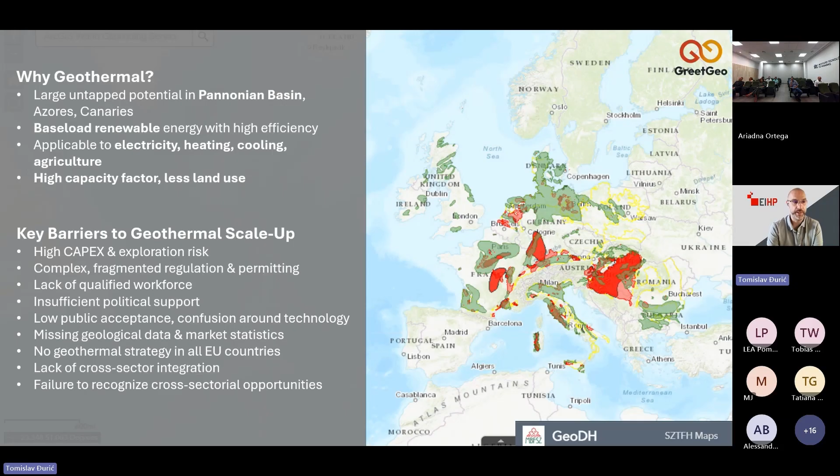So to conclude, there are many barriers, but the good thing is that we will try, through this project, to minimize those barriers.

So what are the objectives of the GreetGeo project? To encourage investment in geothermal energy, especially in less developed regions like the Pannonian Basin and other European areas like volcanic islands. We will develop innovation-based value chains for geothermal projects by connecting research, industry, and local communities, and support the development of regional S3 strategies.

We are going to prepare concrete projects for funding, develop business cases, and provide support for applications to European Union funds. We will also try to reduce investment risk through education and by exploring different financing models. So how are we going to achieve all those goals?

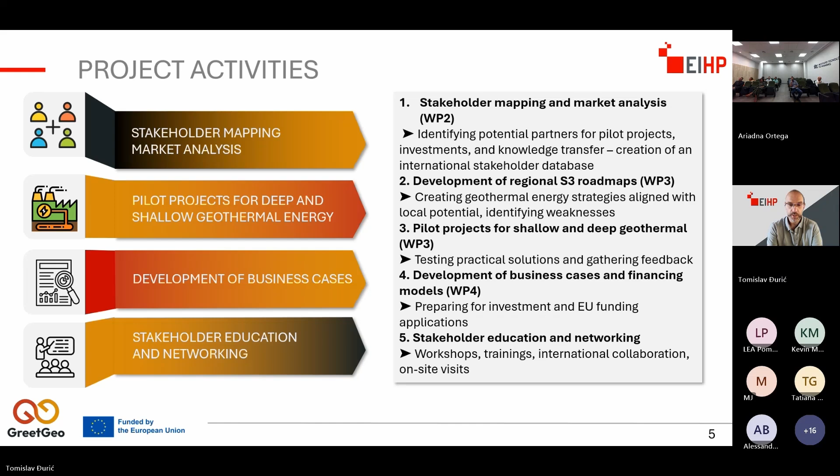There are many areas in the EU that have more developed projects and more developed stories and business cases regarding geothermal energy development, like Italy. But there are some less developed regions in Europe, like Croatia.

You see that we have only 13 exploitation fields, but we are heavily exploring new areas. We will utilize. The plan is to utilize geothermal energy for electricity production, for district heating.

We have by now one geothermal power plant. We have several agricultural utilization, tomato production from geothermal energy, a lot of balneology, spas, etc.

But we are, of course, always ready to receive new knowledge and to receive some new ideas and ways of some innovative geothermal energy utilization.

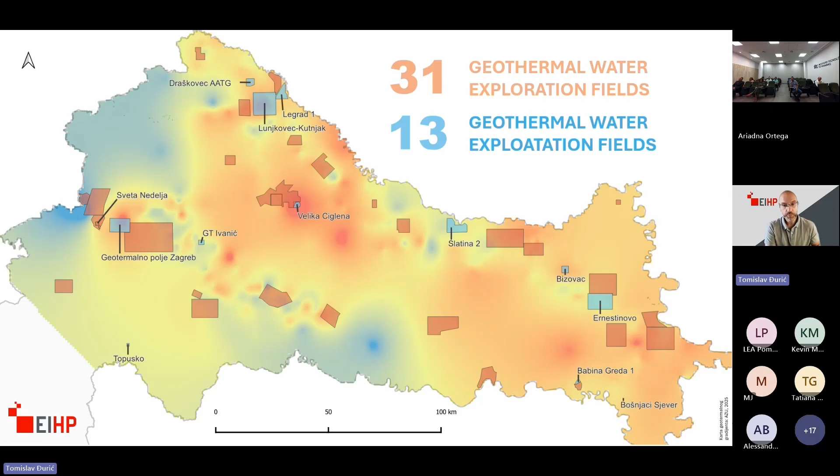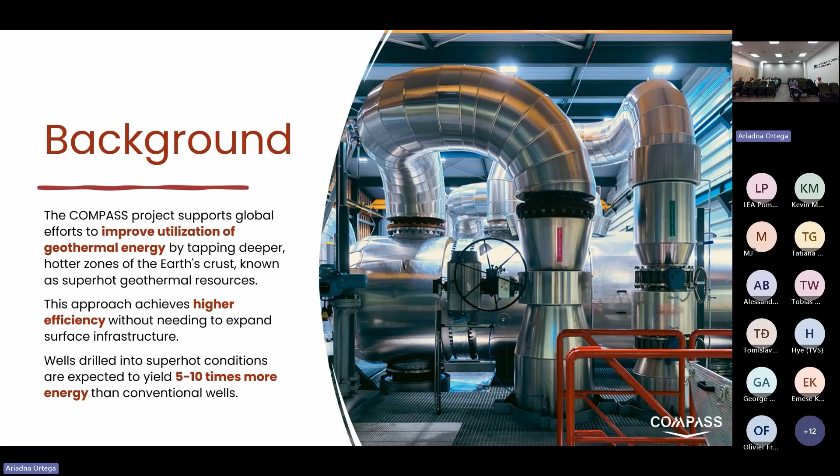So we're going into extreme conditions of geothermal energy. And another layer of that ambition is to improve the efficiency and also the footprint, so drilling less wells for more energy, and yes, wells that can yield 5 to 10 times more than conventional wells. Of course, there are challenges that we're trying to face, and this is why Compass exists.

Given the endeavors also worldwide to push forward such efforts, the major challenge is basically securing the wells, having wells that can withstand these conditions. So well integrity aspects are extremely important, and of course in a superhot geothermal context we have high temperatures and also temperature fluctuations, but also a chemistry that does not actually help with material resistance. So highly corrosive fluid chemistry is also one of the major challenges.

So in Iceland, there is the deep drilling project, the IDDP, which is a decades-long program that has been tackling that challenge of deeper, hotter geothermal drilling, and the experience with the previous 2 wells has given a lot of information. Of course, there were severe casing failures that informed basically the context regarding superhot geothermal and deep geothermal drilling. So Iceland is now preparing also for a 3rd drilling.

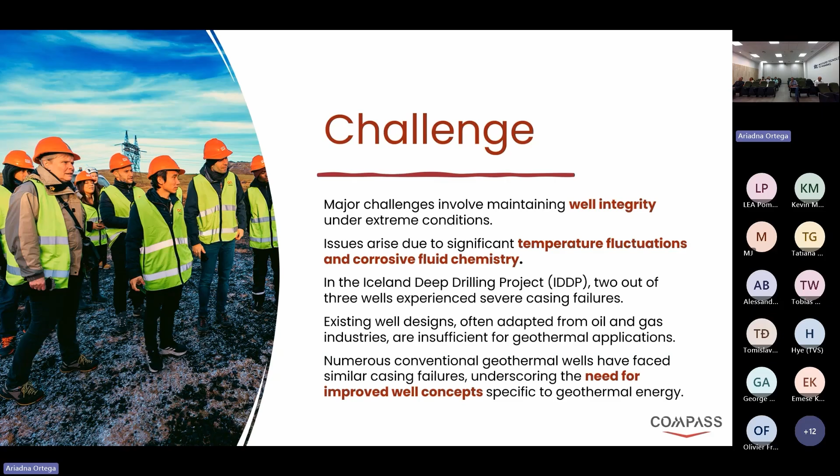So of course, we're working on well-casing technologies, foam cement solutions, laser cladding to tackle the corrosion challenge, and a whole comprehensive well design. Circular by design has been our flagship project as well, to also support the cost aspect. Drilling is costly, and engineering around geothermal is generally costly. So this is something we're trying to tackle, and we're trying to also expand the geothermal potential worldwide and have solutions that can be replicable in other places.

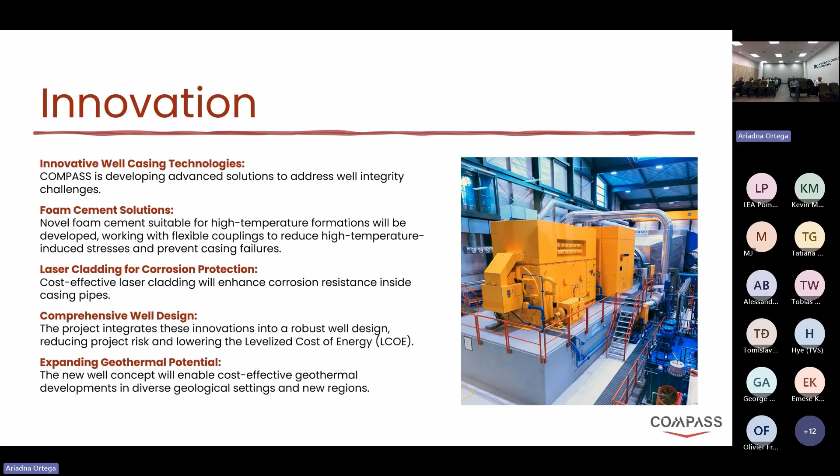So this is our consortium. We are a consortium of 10 partners from all around Europe, and we are supported as well by an external advisory board who has been actively involved with us over the lifetime of the project. Of course, we've been doing a lot of outreach. Part of Compass is also to support the social aspects regarding deep and superhot geothermal energy and high-enthalpy geothermal energy in general. We recently held Compass Iceland Week, where we had...

A large program, including a summer school, trying to train the next generation of experts in that field. We had a regional stakeholder workshop as well, same as what we're doing here, to initiate the dialogue within Iceland about the upcoming developments and what it means to move forward with drilling in these contexts.

And we've held workshops as well in Italy, where we have also our focus. So Compass focuses mainly on Iceland and Italy as case studies in a way. We also want to replicate towards island nations context and support awareness around the possibilities of these resources. So we're holding right now our workshop in the Canary Islands, planning another one for the Greek Islands, and had webinars, articles, presentations, and various events. We are looking forward to our final event in the European Geothermal Congress in October.

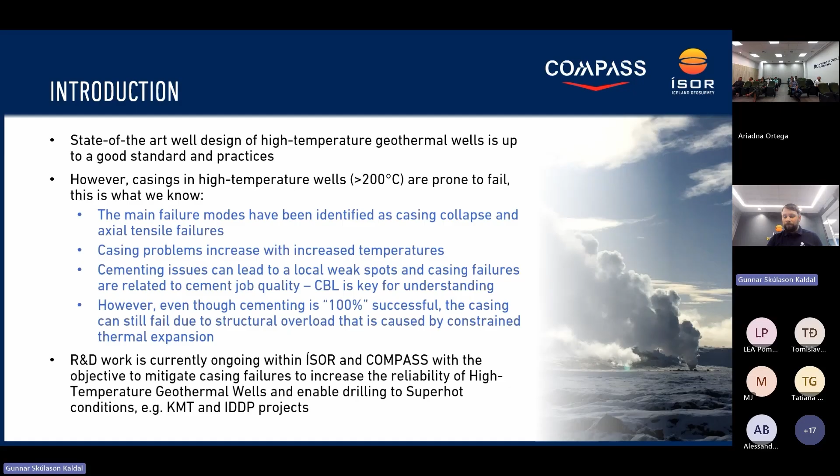So there is R&D work currently ongoing at ISOR and within Compass to mitigate these casing failures and increase the reliability of high temperature wells and enable drilling into superhot conditions. For example, the Krafla Magma Testbed project, drilling into magma, and the Iceland Deep Drilling Project. Now, high temperature geothermal wells have several stages, drilling stages, and casings are needed for each stage to be able to drill safely.

The casings are anchored with cement all the way to the surface. During drilling, there's circulation or injection of drilling fluids that keeps the well cool during the drilling project. When drilling has been completed and the well starts to heat up, the casings will thermally expand, and normally they develop stresses above the yield strength of the casing material, producing permanent deformations or plastic strains in the steel.

That calls for strain-based design in the code of practice, but in most structures around the world, they are designed to be elastic. So this is quite unusual to know that we have plasticity in the structure.

The typical temperatures we're dealing with in high temperature wells are about 200 to 300 degrees, all the way up to maybe 350 in some extreme cases. But in the super hot region, we are looking into 400 to 550 degrees even. We know that with the current structure as it is today, the most common casing materials will go past the yield strength at around 150 to 200 degrees for K55, and 210 to 240 degrees for L80, API L80 materials.

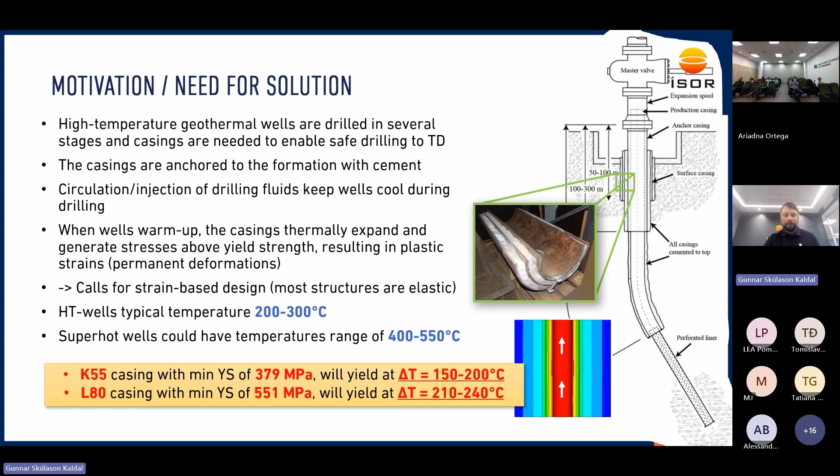We have done a survey of 136 Icelandic high temperature wells, where 75, or 55%, had some reported incidents. One quarter of those were confirmed casing failures.

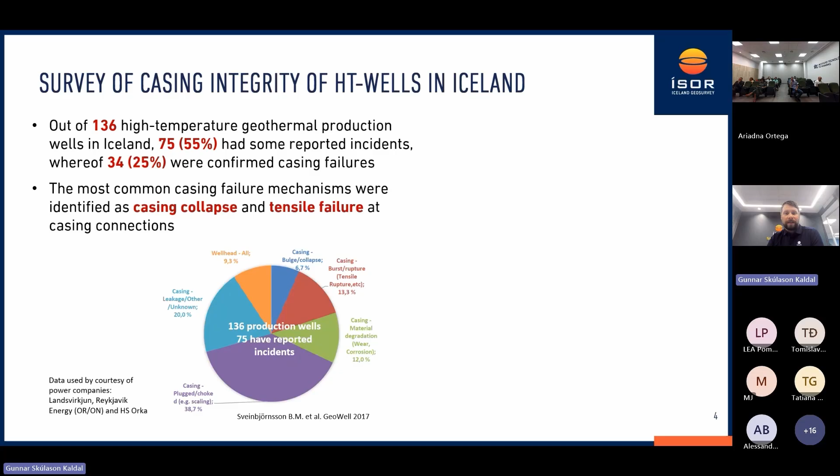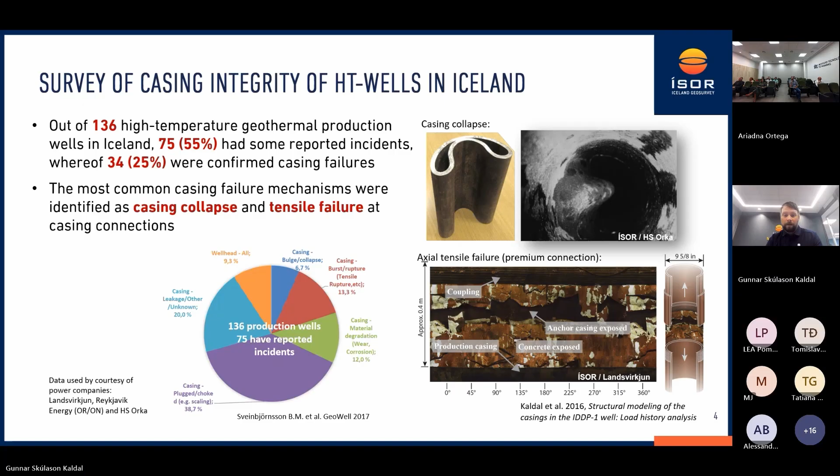We found that the most common failures are casing collapse, the one above, and tensile failure, where the casing tears apart if it cools down after being in hot conditions. We also see a high percentage of corrosion and wear problems, which Tommaso will talk about solutions for after me.

This is what we are doing in Compass in terms of increasing the integrity of the wells. We're looking into casing corrosion mitigation, cement solutions, thermal expansion mitigation, and casing collapse prevention.

I'm going to talk a little bit about these two, starting with the flexible coupling. The flexible coupling is a patented technology that has been in development at ÍSOR since 2015, based on the research we showed you before in Iceland and around the world.

These surveys let us know about the problems we need to solve. We have built prototypes and tested them at ambient to high temperature and pressure conditions, and a full casing string with these connections has been run in a well on ON Power's field in Nesjavellir. It was done this year.

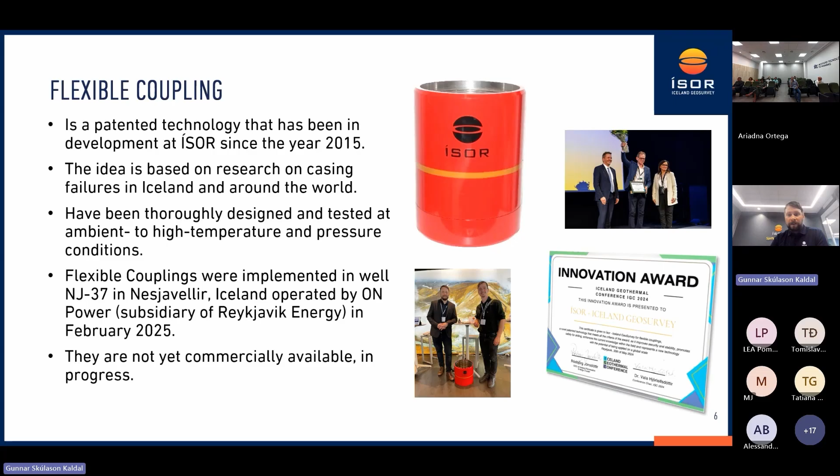The flexible coupling is not yet commercially available, but we are working on that. So how does it work?

So what we are doing with the flexible coupling is trying to work in the elastic range of the material, so we are not allowing the casing to get to these high stresses.

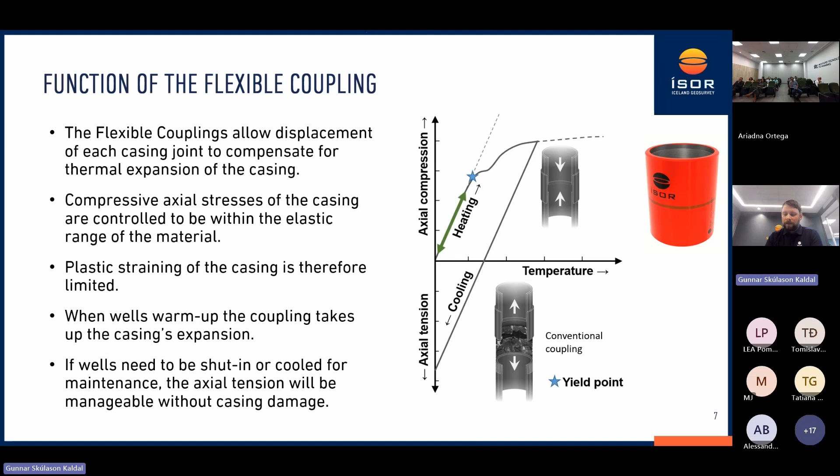How does it work? If we look into the coupling, we can see there is a thermal gap, and this thermal gap closes down when the casing expands. So instead of creating these high forces, it allows each casing joint, about 12 meters, to expand. And if the well needs to be worked on and cooled or injected with drilling fluids, it simply opens up again.

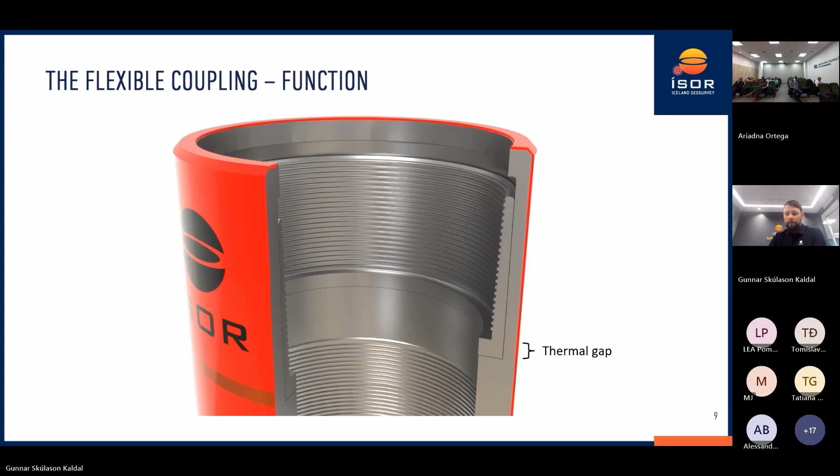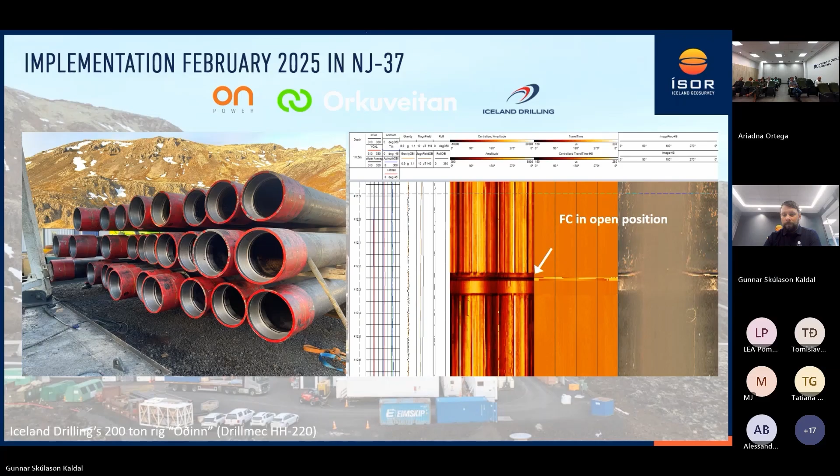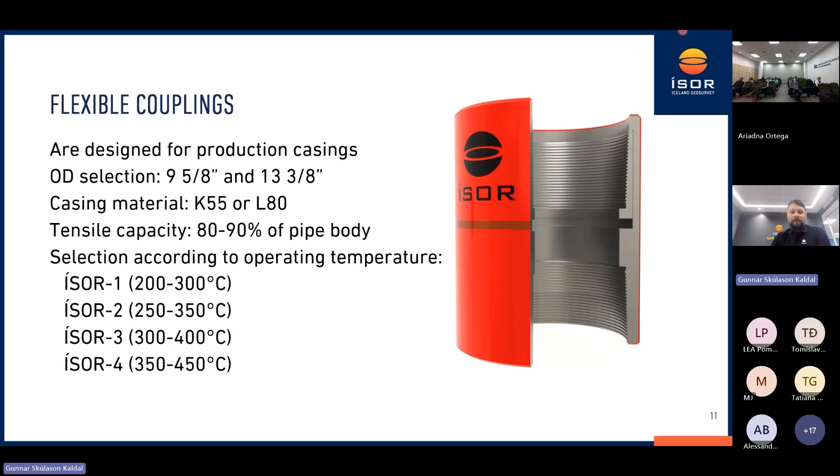So we have two sizes for this. These are the most common casing sizes for high temperature wells: 9 5/8 inch and 13 3/8 inch. We can choose what material it's made out of, and we can select the thermal gap according to the temperature that we need.

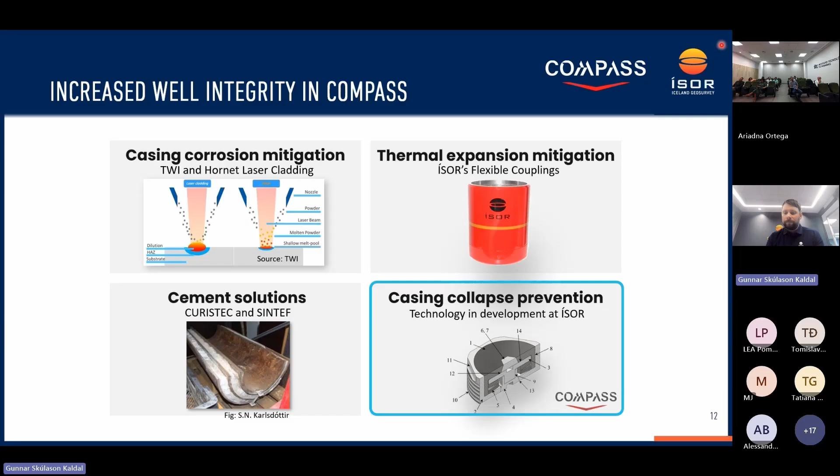Now for the other mitigation we are developing within Compass, this is casing collapse prevention. This is based on the fact that fluids can get trapped in the annulus between casings in the cement, and if the excess water in the cement is too high, it can develop pressures and collapse the casing. This can be identified in a CBL log, where we can see there's cement missing in a spot or section.

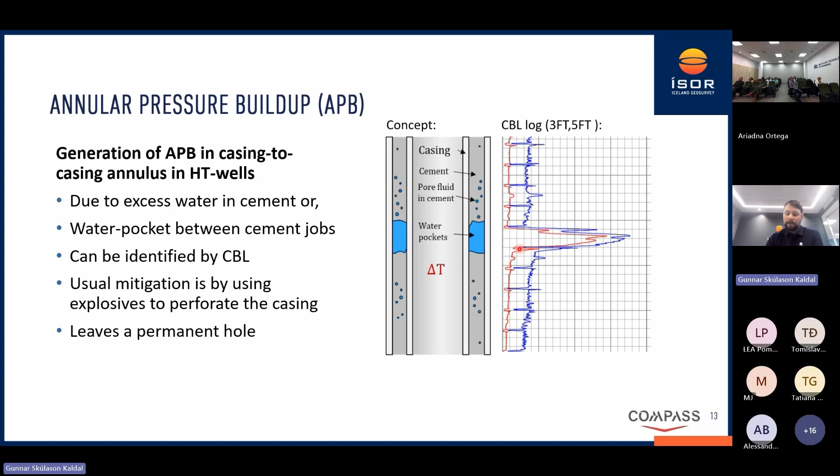The usual mitigation is to use explosives to perforate the casing at this depth. That leaves a permanent hole, as you can see here, but relieves the pressure out of the annulus. If the risk is left untreated, we will most likely get something like this, a collapse or bulge in the casing.

So how can we further control this? Obviously it's not the best option to have a hole in the casing, so we are trying to look into what we can do to reduce the risk. We have been looking into flexible cement solutions to allow some pressure to be relieved in the cement itself, using more flexible solutions such as foam cementing, which can be more flexible than conventional cements and provides pressure relief within collapsible bubbles in the cement.

This is being worked on by our partners in the Compass project. The other solution we're looking into is this casing collapse protector. The idea is simply to introduce an element into the casing wall where we allow the pressure in the annulus to escape into the well while the well is heating up.

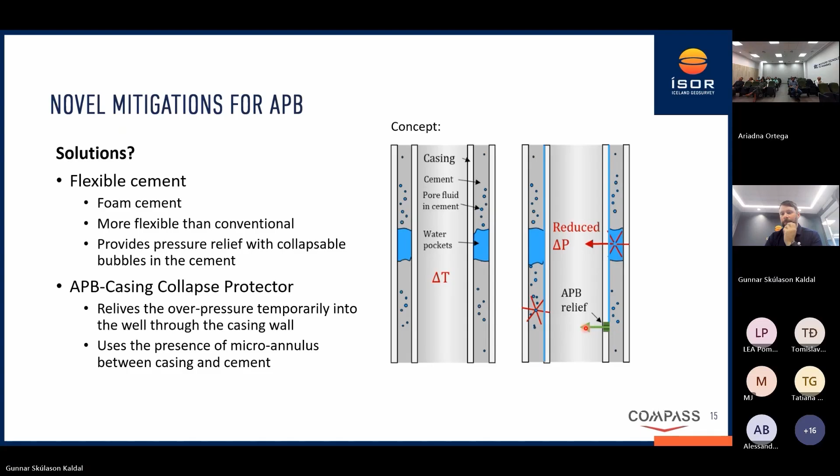We know that we have microannulus in the wells. We can see that from logging - with CBL loggings, after the well has heated up, we can normally see there is this microannulus. So we are using that to actually get a route for the pressure to escape into this valve. This is a relief valve that relieves this pressure without the casing collapsing.

And this is, as I said, in development in Compass. It is at a rather low technical readiness level at the moment, but we have already applied for a patent and built several prototypes that we are testing in the project.

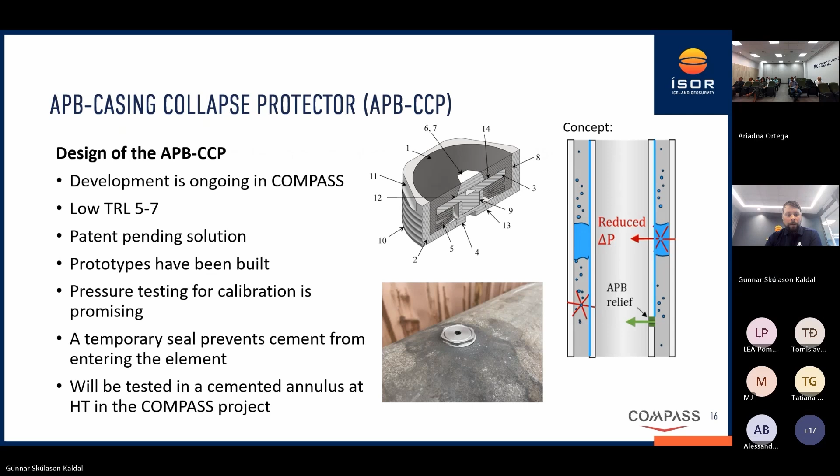We also looked into how to seal the element during cementing. We have a temporary seal that is not shown here, so when cementing is ongoing, the cement will not clog it or go into the element - it will only activate when the well heats up. We are testing this in testing equipment in the Compass project, along with the flexible coupling and the foam cementing we are looking into.

Thank you very much, Gunnar, for the introduction and background on some of the problems we're having in the wells. I think it's a really great solution you guys have applied throughout the project. I'll be talking more on corrosion and the issues corrosion can cause within geothermal wells, and how TWI has aided the process of reducing this issue.

Within the project, it was proposed to use corrosion resistant alloys, or CRAs, and coat the internal diameter of the pipes with more corrosion resistant materials - stainless steel and nickel alloys. A couple of materials were investigated throughout the project: stainless steel 316L, Inconel 625, and Hastelloy C276, to reduce the amount of corrosion.

Within the project, TWI also wanted to perform something more pioneering, outlined within the Compass project, using EHLA - extreme high-speed laser application - rather than direct energy deposition. This allows us to do something much faster and more efficient with thinner layers, so we can be more cost-effective.

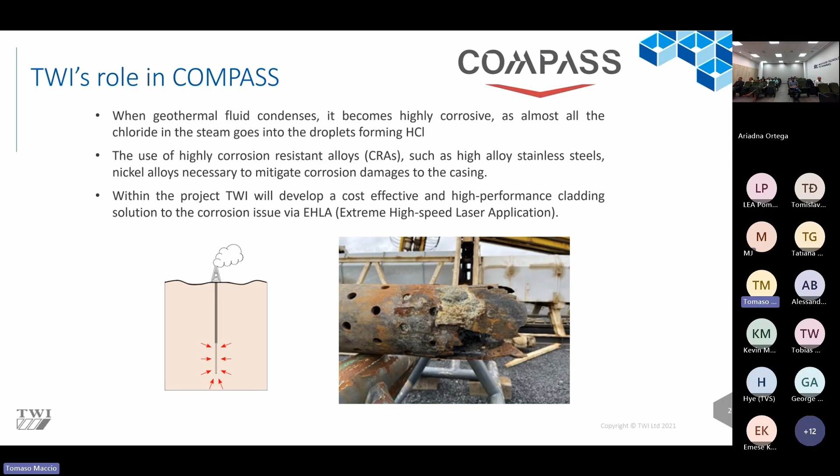Next, we want to understand EHLA. So what is EHLA, or extreme high-speed laser application? We're able to put down thin, accurate layers with low dilution at very high speeds - anything from 25 to 500 meters per minute.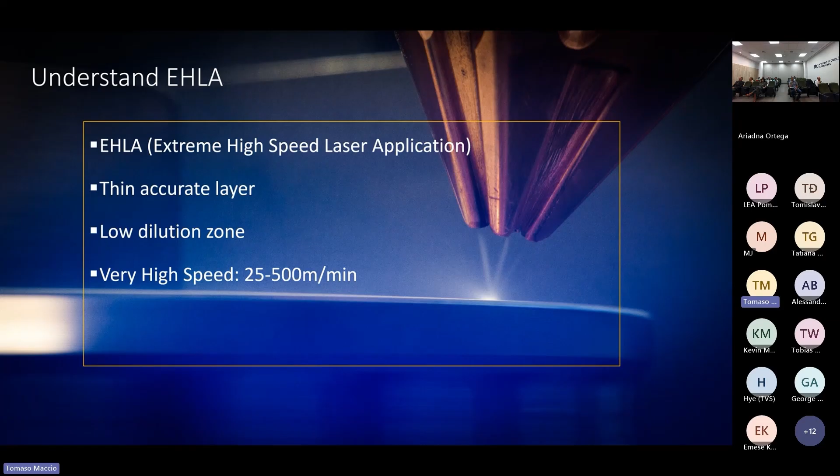So you're getting a lot of mixing, and this happens because the focus of the laser beam is melting on the substrate with the powder, whereas in EHLA, the melting happens around 1 to 2 millimeters above the substrate. So what happens in this process, the melting of the powder happens above the substrate and is sprayed on while it's still molten, sticks to the substrate, and creates a metallurgical bond.

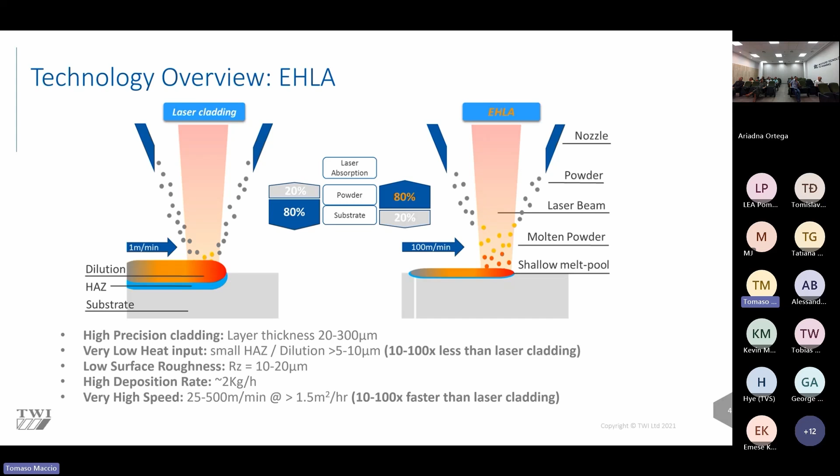So we can do high precision layers, anything from 20 to 300 micron layer thicknesses with very low heat input, anything from 5 to 10 micron heat affected zone, with very nice surface roughness as well, and high deposition rates. We're able to go at high speeds too, so 25 to 500 meters per minute. This is EHLA in process.

So just to give you an idea of the speeds that we can process at, here's another little video, and it gives you an idea of the schematic as well. So the nozzle is the triangular piece, that's where powder's blowing through. You can see the powder here in this area, and the laser beam is focused through the cone in the center and deposits onto the substrate.

So you're able to do high speed processing. You can see that wasn't sped up, that was in real time as well, just to give you an idea of the speed of the process.

So what other applications can EHLA be used for? EHLA is used for chrome plating replacement, as a thermal spray alternative, weld overlay replacement, and application for corrosion and wear like we're using within this project. And then we're looking more into a crossover with green technologies, like we are currently.

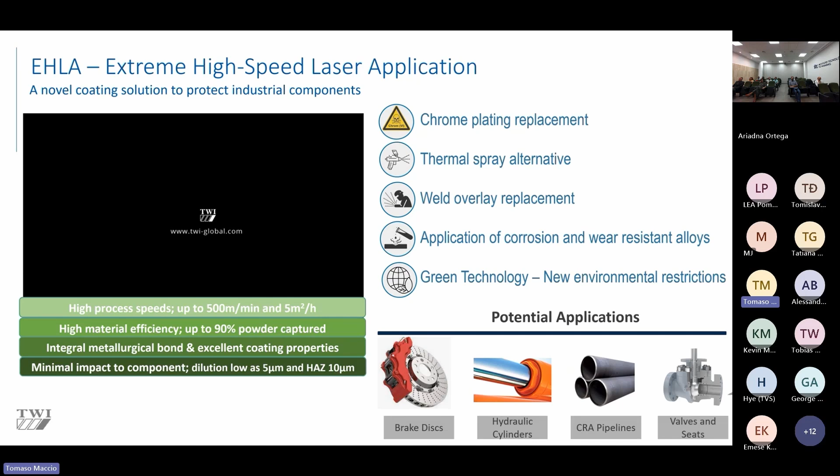There's also the use of brake discs we could use it for, and hydraulic cylinders, and corrosion resistant alloy in pipelines and valve seats.

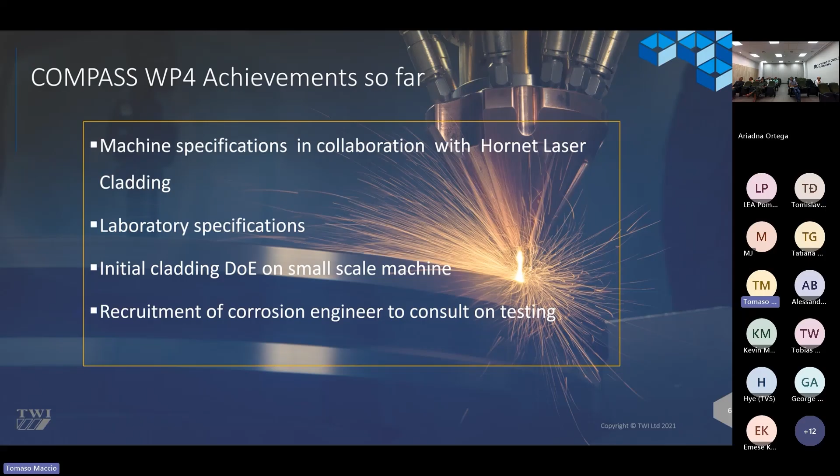So Compass, and what Compass has done so far. Machine specification in collaboration with Hornet Laser Cladding, laboratory build, recruitment of engineers, and then installation, initial design of experiments, and then the final design of experiments and some results following that.

So the Compass machine was installed in September 2024. It's been installed with a 12 kilowatt laser, so a high powered laser, and a 6-axis robot that's allowed us to program in several different areas of the bed and to create the samples and geometries for the testing that we've been doing within the project.

We've also installed a fully interpolated turntable that's been very useful for doing samples and geometries, and we've got a load capacity of 1,000 kg. This is useful for the pipelines that we can add in.

So this is just a feasibility study at the moment, it's not the full length of the machine. We're not able yet to clad the full 12 meters on this machine, we could clad 4 meters externally, and 4 to 5 meters if we rotate the component around. So it's just for the initial feasibility study of doing the cladding within this work package.

So I'll go into a little bit of the results so far and characterization that we completed on selected parameters. Not everything, these are the selected ones that were most desirable, really, the best results that we got. It's important when doing laser cladding, and especially extreme high-speed laser application, to balance the parameters right.

So if you're getting too hot, something that we noticed when samples were too hot, we got hot cracking, which is solidification cracking. When the deposited material is cooling down, we got cracking. We don't want cracking when we're trying to reduce corrosion and apply a coating on components, so that's something to consider.

Then also when using higher power, sometimes you might get gas pores. The lower melting point alloys within the alloy can boil off and vaporize, so that can be an issue as well.

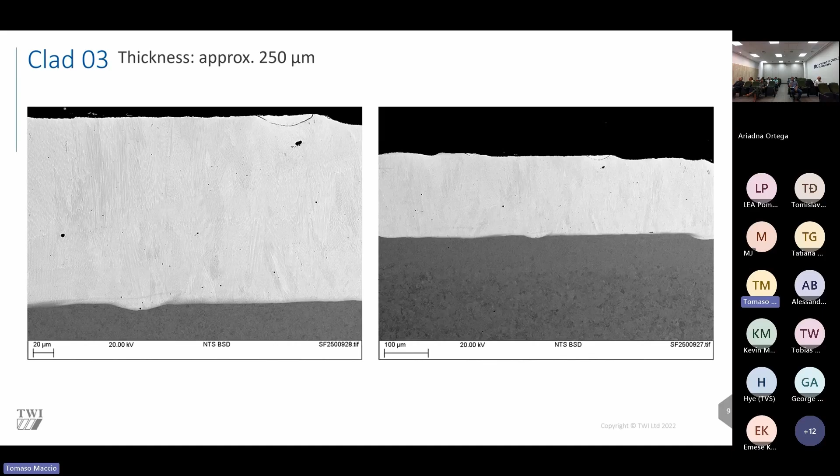But this sample here is most desirable, so very minimal defects. You can see there's some small defects over here, but judging by the scale bar, they're not over 5 microns in width, and then there's some tiny pores here. You can also see that the grain structure is very columnar, which is desirable for the coating compared to the substrate. The next few slides will demonstrate nicely the heat affected zone and the low dilution as well.

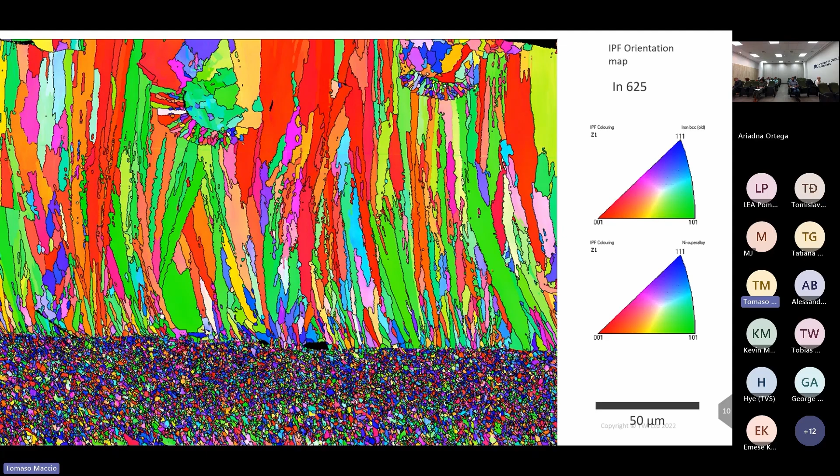So this is some EBSD completed within the component. You can see the nice difference in substrate to deposit in the grain structure. We're getting nice long columnar grains, which is desirable and expected from laser cladding as well as EHLA. This is what we were looking for, and we can also see that there's not much mixing of the material. The heat affected zone shown here, with traditional laser cladding, you'd be getting a large amount of dilution and lots of mixing, lots of iron, and the substrate would be more penetrable. This is something really nice to display the heat affected zone and the lack of mixing that's going on, which is again desirable for us.

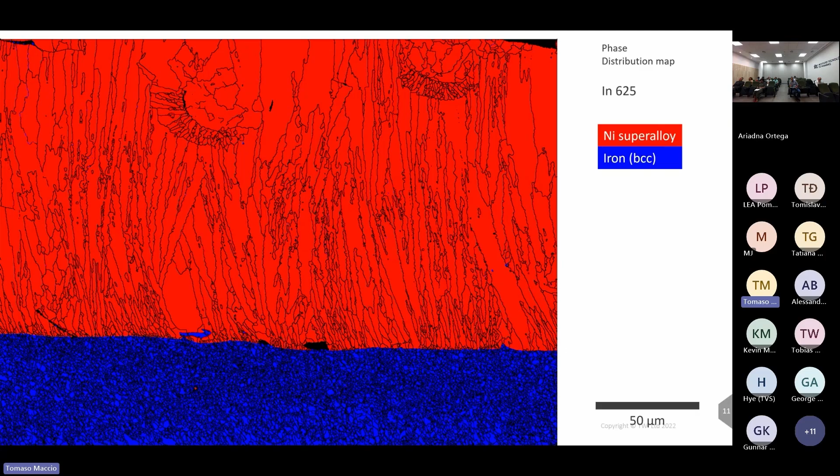So we've got nickel superalloy. This is a phase distribution map, with nickel superalloy displayed in red, and iron displayed in blue on the substrate. It's really doing as we expected, with a minimal amount of mixing, which is what we want, so less susceptible to the HCl that would be present in some of the material.

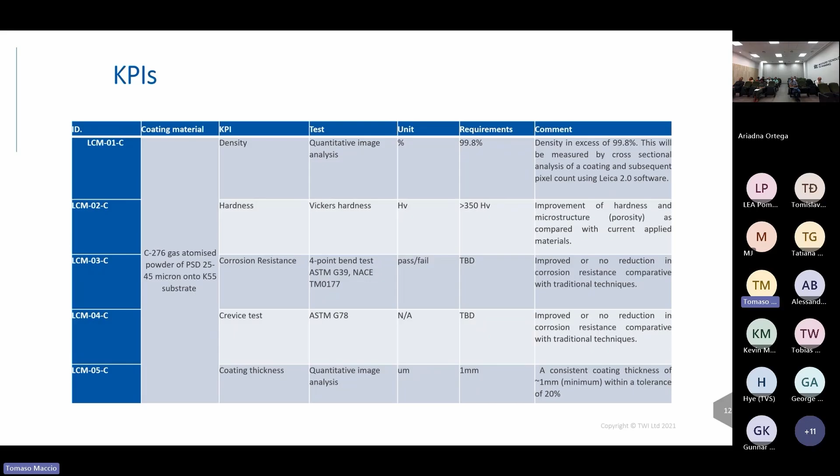After the analysis, we completed the analysis and we're happy. We've produced a large array of test samples to look at the KPIs, so density, as we described, with a high amount of density and hardness, and then we'll go on to do the corrosion resistance and coating thickness analysis.

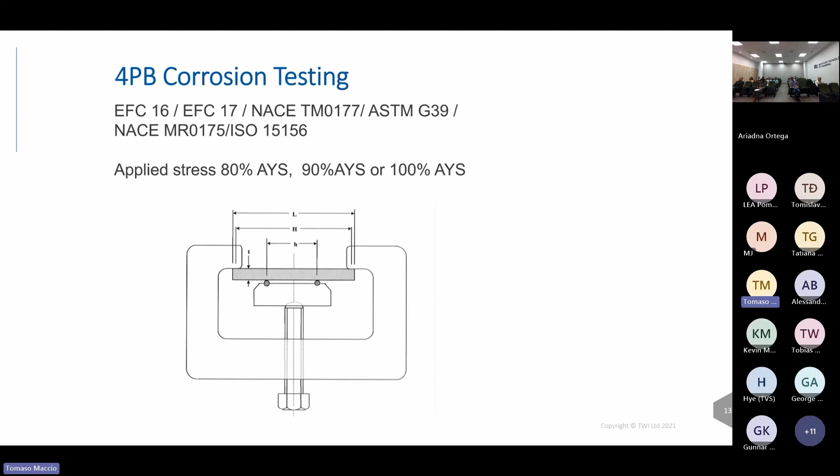Coming up in the next 2 months, there's some 4-point bend test corrosion testing to take place with different stresses applied, completed in our laboratories in Cambridge and also with ISOR, our colleagues in Iceland. Then there'll be autoclave testing, in a brine solution similar to the geothermal environment, testing samples coated and uncoated, and measuring the weights afterwards to see the losses caused by the corrosive solution.

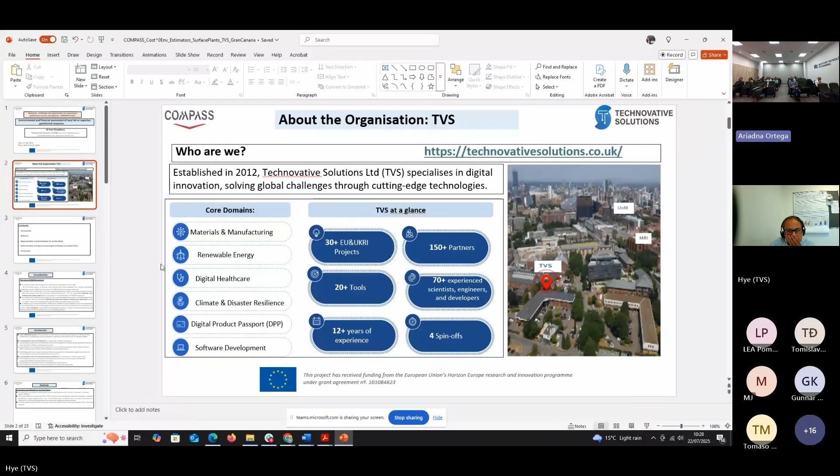Okay, just one. Para tener acceso. Screen one. Can you see my screen right now? Yes, now it's correct. So if I move the slide, can you see the changes? Now it's changing.

Okay, so these are the contents of the talk today. So first I would like to talk about what are the roles in Compass projects.

So what we are doing in the Compass projects, we are developing two estimators: one we call the cost estimator, and another we call the environmental impact estimator based on the LCA model for environmental estimation, and also a parametric cost model.

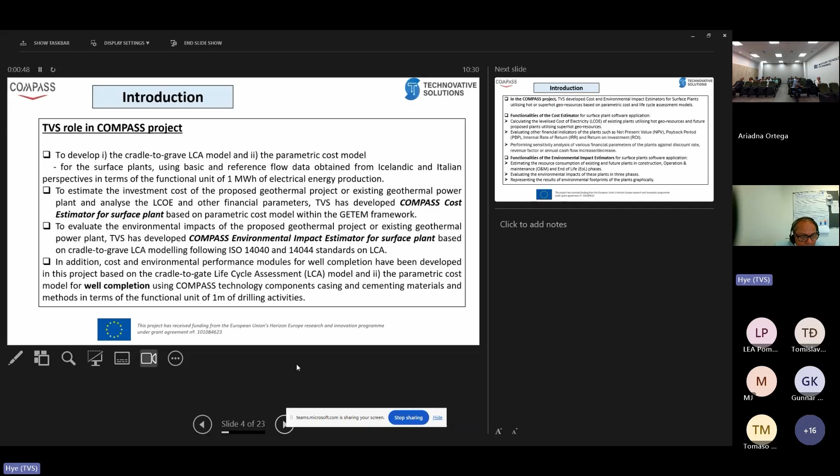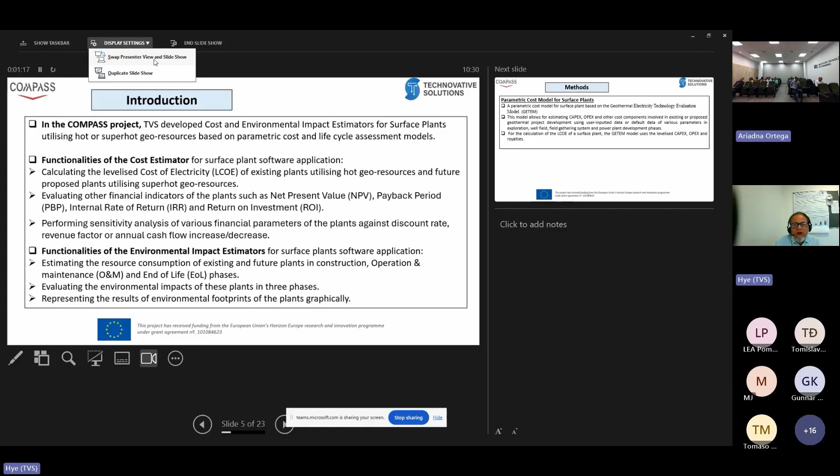Could you put it in presentation mode? You can see my presentation mode right now. Can you see the screen changes? We're seeing it in presenter's mode, so if you have two screens, you need to pass it to the other screen. Go to display settings at the top of the screen, click on the display setting and swap presenter view with slideshow. The first one, swap. Now you can see my introduction.

That works, thank you. It's working properly now. Thank you, okay, right.

So actually, I just talked about what are the roles in Compass projects. So what we are developing in the Compass projects, we are developing two models: one, the cradle to grave LCA model for the surface plants and the well completion, and also we develop a parametric cost model for the surface plant and for the well completions.

So how we do this, that's what I'm trying to explain. Based on these models, we also constructed an estimator, the Compass cost estimator for surface plant, and also the Compass environmental impact estimator for surface plant.

In addition to these two tools, we also developed cost and environmental performance modules for well completions based on the cradle to gate LCA model and the parametric cost model for well completions, using some Compass technology components like casing and cementing materials, and other technology components.

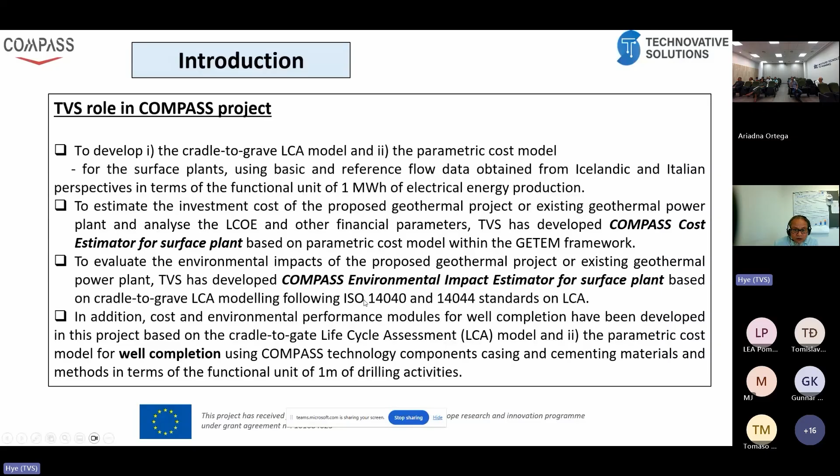So the functional unit of the well completion is 1 meter of drilling activities. I'll talk about only the cost estimator for surface plant and the Compass environmental impact estimator for the surface plant. If I move on to the next slide, this is the functionalities of the cost estimator.

I'm just telling you what we do with the cost estimator. It can estimate the LCOE of the existing plants or the future proposed plants utilizing superhot geo-resources.

And also, not only calculating the LCOE, we can also evaluate other financial parameters such as NPV, payback period, IRR, and return on investment.

We can also analyze the sensitivity of various financial parameters such as NPV and others against the discount rate and revenue factor, changing the discount rate, revenue factor, or annual cash flow increase or decrease, so we can see how the changes will occur due to these factors.

And the functionalities of the environmental impact estimator for surface plants: we can estimate the total resource consumption because we are doing the cradle to grave analysis. So we need to know the detailed inventory data of the plants in the construction, operation and maintenance phase, and the end of life phases.

Based on this data inventory, we can evaluate the environmental impacts of these plants in three phases, in terms of a functional unit, what are the environmental impacts per megawatt hour of electrical energy production by these plants.

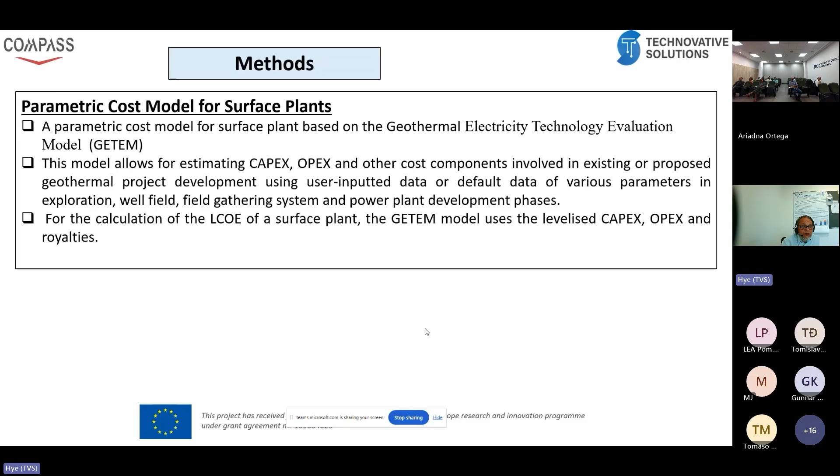Based on this, we can evaluate the LCOE and estimate other financial parameters. These are the methods for the LCA model for surface plants. We choose cradle to grave, which is why we consider the construction phase to end of life phase.

For modeling the geothermal power plant, we need to know the basic data inventory of the existing or proposed plant. For the case study, we considered two perspectives: the Icelandic and the Italian perspective. That's why we chose two plants, one from Iceland and one from Italy. They are using very hot geo-resources.

So we collected all the inventory data from these plants and converted this reference flow data into resource consumption data, then functional flow data, using our SimaPro LCA tool. This tool is linked through API with our environmental impact estimator, which can estimate environmental impact such as climate change, carbon footprint, and other environmental footprints. These are the methods we follow for LCA.

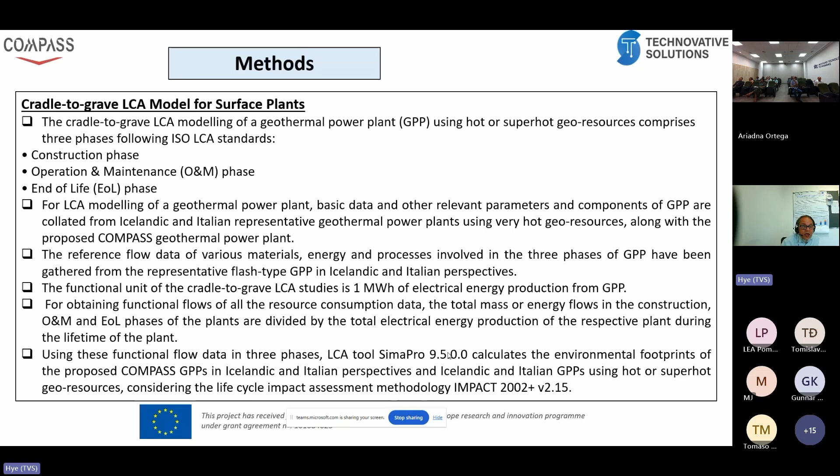And these are just a snapshot of the cost estimator tool for surface plants.

If I go into the tool directly, I hope I can move forward. So you can see my desktop where I go into the home page of the cost and environmental impact estimator. Can you see my screen? Yes, we can. Okay, that's fine.

This is the home page where we have developed two cost estimator tools, one for well construction, another for the surface plant, and two environmental impact estimators, one for well construction, another for the surface plant.

We first estimate the total resource consumption in three different phases, then convert all this resource consumption data into functional flow data, and then we can evaluate the environmental impact in terms of one megawatt hour of electrical energy production by the plant. So that's the way it works.

It takes time to go through all these components, so I'm going back to this one. There's some snapshots since there's a time constraint.

These are the tools where we can choose which plant we are evaluating for cost analysis or cost performance. So I'm choosing the Icelandic plant, and then the characteristics, temperatures, and resource depth. These are the necessary parameters we need to evaluate.

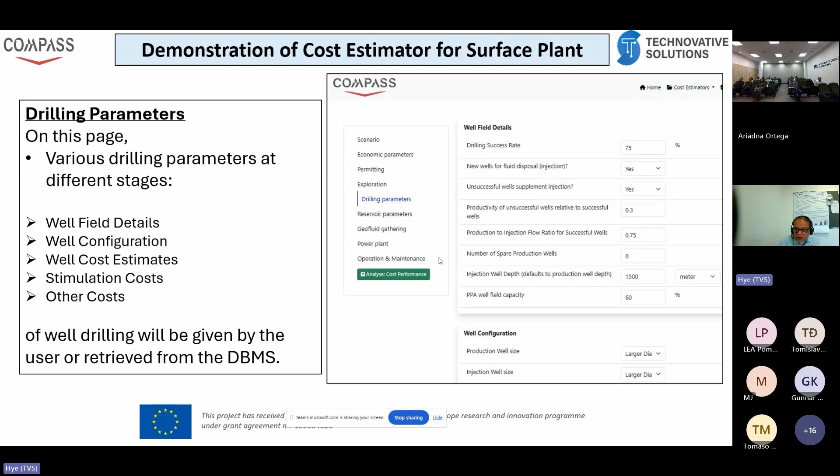Most of the data are default parameters from the GETEM, and some of the data is from secondary literature for the Icelandic case study. So this is where I can evaluate.

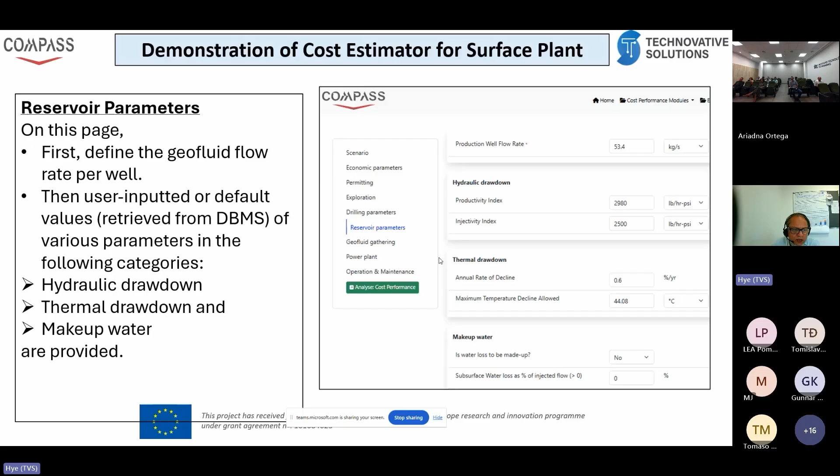Once we choose this, we can click 'analyze cost performance,' and it evaluates the LCOE, how much LCOE for that particular plant, whether Icelandic, Italian, or our proposed compass plant. That can evaluate the LCOE values.

I can show this in one table, along with other cost values, for example capital cost in million euros per megawatt, exploration cost, and total annual operating costs. All of this can be evaluated from the cost estimator tool.

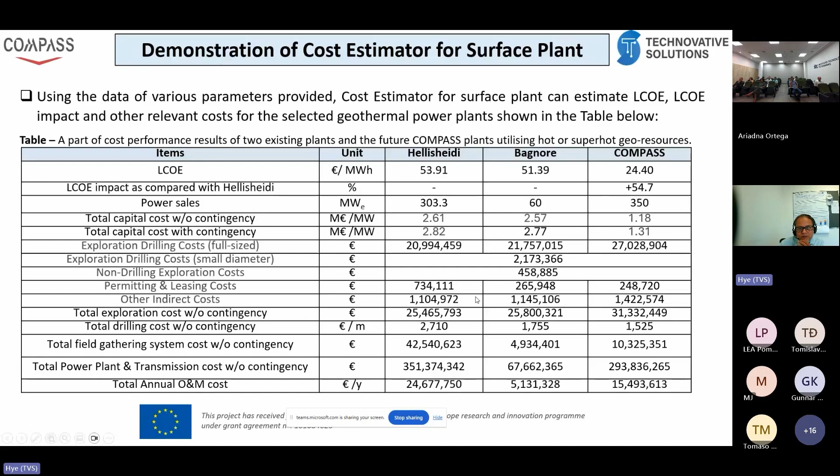It can also evaluate other financial parameters: NPV, PBP, IRR, and ROI. I'm just showing the results here.

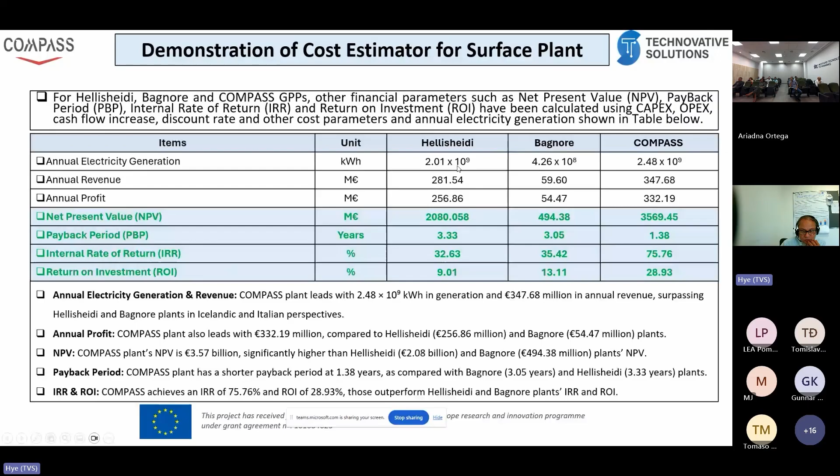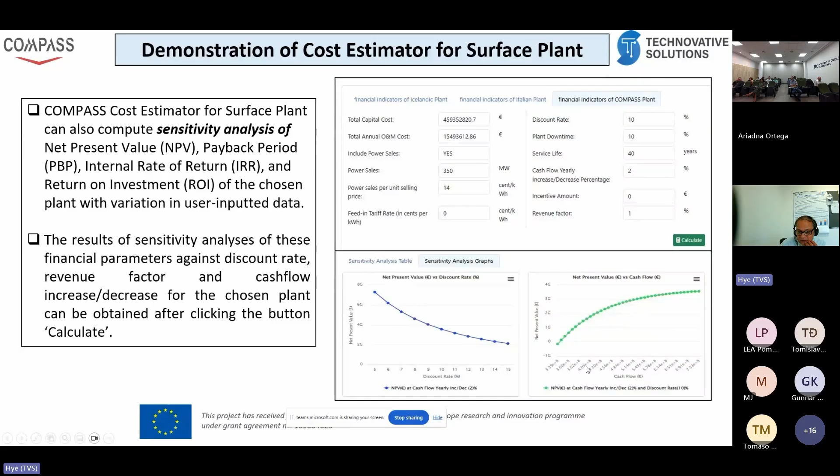It can also compute sensitivity analysis for net present value against discount rate, or net present value against cash flow. This is how we can understand the functionalities of the cost estimator for surface plants.

If I talk now for the next five minutes about the environmental impact estimator for surface plants, you can go to the tool again, and I can go straight to this site.

You can choose which plant you are considering. We collected all the data for the Icelandic plant Hellisheiði and the Italian plant Bagnore, and also collected all the data for the proposed compass plant from an Icelandic perspective.

If I consider only the Icelandic plant Hellisheiði and the compass plant from the Icelandic perspective, these are the parameters we have, and based on this, we can calculate. If I go back to the presentation slide, then yeah.

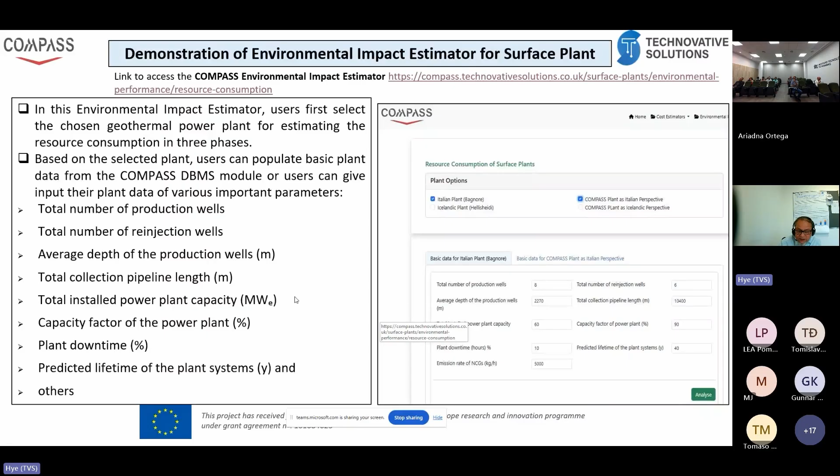So there are some slides. These are the necessary data you need to input into the environmental impact estimator tool to evaluate the environmental impact of the selected geothermal power plant. If I move to the next slide, these are the resource consumption data for the construction phase, shown here.

This is a screenshot from that tool. This is the maintenance phase data, atmospheric phase data, and end of life phase data. All this resource consumption data can be converted into functional flow data, so we can express environmental impacts in terms of a functional unit, which here is 1 megawatt hour of electrical energy production.

If I move to the next slide, these are the results we are presenting for the Italian plant and for the Compass plant from the Italian perspective. I can show the carbon footprint. Climate change impact is about 50.8 kilograms CO2 equivalent per megawatt hour of electrical energy, and for the Compass plant it's about 9.87 kilograms CO2, based on the data we have evaluated.

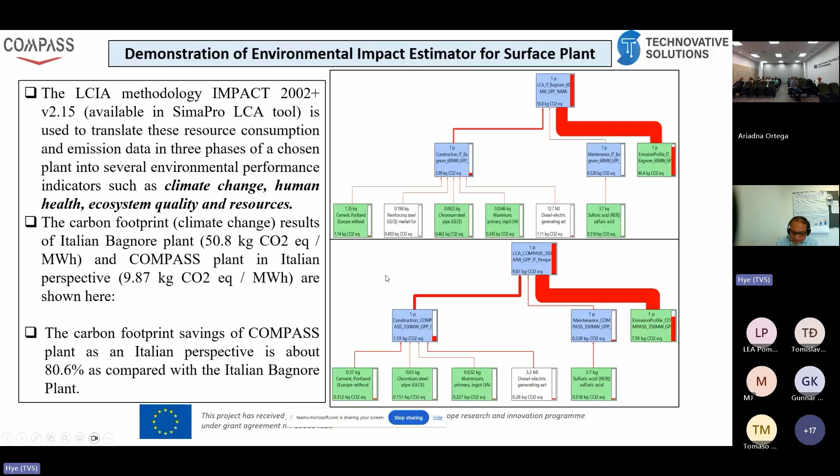If we have more primary data, that result can vary. So this tool just demonstrates what data from secondary literature we have for the baseline plants. We have evaluated the environmental or carbon footprint of this plant, and also for the Compass plant from the Italian perspective, we can generate results. Then we can understand the impact of the Compass plant from the Icelandic and Italian perspectives. So these are the environmental footprint results in a glimpse, with some graphical presentations.

Finally, I'll conclude with what we have developed for the cost estimator, and the benefits from these two tools. We can compute key financial parameters like LCOE and others, which helps investment decision making. We can also do sensitivity analysis, understand which factors incur more cost, and evaluate multiple cost scenarios for better planning and decision making. These are the benefits from the cost estimator for geothermal projects utilizing very hot or super hot georesources.

Moving to the last slide, these are the benefits from the environmental impact estimator. We can evaluate the environmental performance of geothermal plants, supporting sustainability goals. We can understand the risks, regulatory compliance with environmental standards for the geothermal sector, and improve decision making, transparency, and stakeholder communication.

So finally, these two tools, along with two other tools for well completions, will be integrated with the Compass decision support system developed by SINTEF, working seamlessly within the Compass DSS. This Compass DSS can enhance geothermal project feasibility studies for utilizing very hot georesources. That's all from my side. Thank you very much.

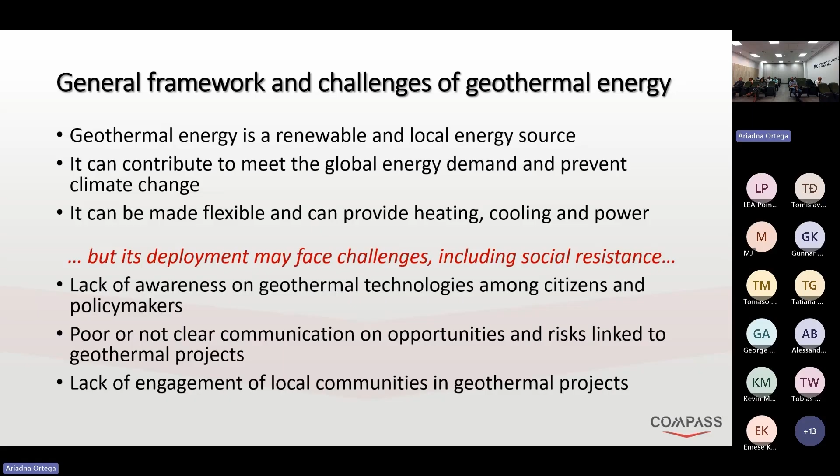Because, as we will see later, if we don't involve local communities in geothermal projects, then there is a wide distance between the operators and projects and the local communities, and this can result in problems from the acceptance point of view of local communities.

So the social acceptance aspects should not be underestimated, because local action groups and networks of action groups against geothermal energy can influence politics. This can result in delay or stopping of geothermal projects, rejection of requests for authorization, and even damage to the entire sector, because the echoes of contestation can reach the governments and even the European Parliament.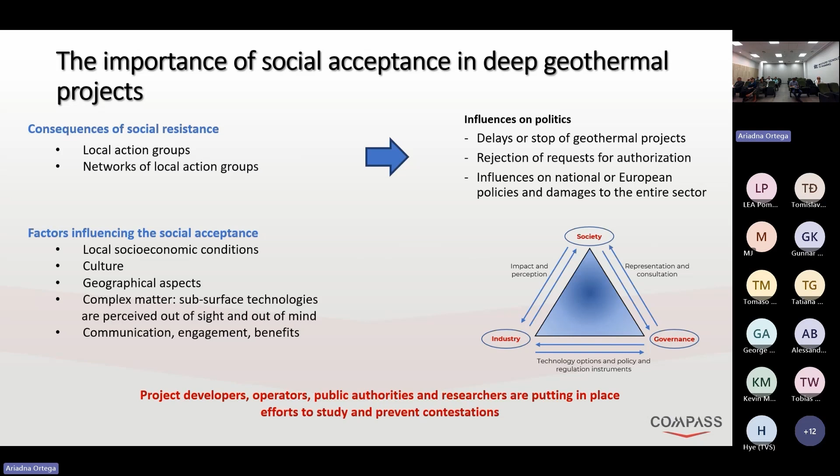But lately, developers, operators, and authorities are putting in efforts to prevent contestations and find ways to go ahead with project developments, because contestations can often block and stop geothermal projects.

Within the Compass project, with Georg and with Amel, we did research on case studies on how social acceptance has been managed in different countries. We took into account more than 40 publications and case studies in 9 European countries plus 4 non-European countries, and we saw how public acceptance was managed. We were able to distinguish between best practices and bad practices according to the results of activities carried out at the local level with communities.

So there are positive examples in terms of communications, and negative examples, and the same for social engagement. Because it's important to communicate with local communities and to engage with them, as I was saying in the first slide.

Communication should start early in project development and should be tailored. Risk and mitigation measures should be communicated, and local authorities and scientists should be involved. We should clearly explain the benefits, because a negative example is to create too high expectations or to communicate benefits only. There are case studies where high expectations were created, and local communities ended up expecting more than what the project could offer in terms of socioeconomic benefits or direct uses or access to energy, for example in remote areas.

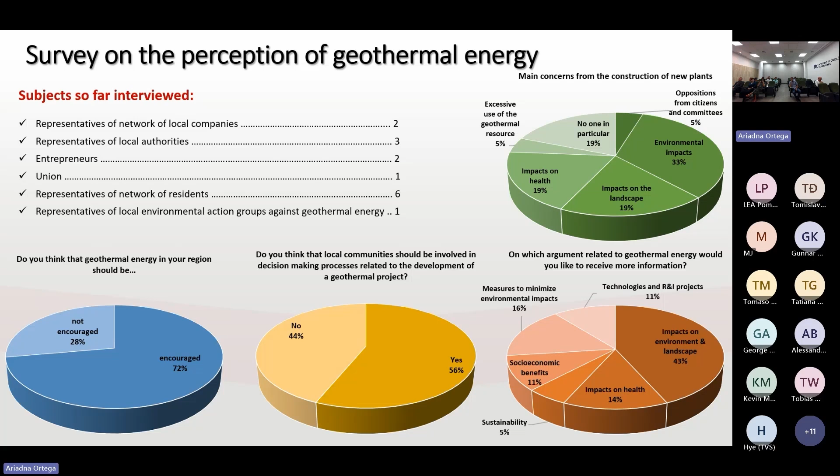And then, of course, people would like to know more also about the potential benefits of geothermal energy. The results of the participatory session showed proposals in line with the survey results, which is still ongoing. There were about 3 topics: mitigation of impacts on the landscape, benefits, and communication engagement of local communities.

The proposals of people were that it's important to develop green barriers in geothermal plants, for example around pipelines in the countryside. All the plants installed in that area are using flash technology, so they are big plants.

The benefits they propose are to reduce cost for heating and cooling, for power production, and the fees for the use of electricity for local communities. More services, because they expect an increase of people as a result of the increase of jobs at local level. It's in the countryside, and that area is affected by depopulation because it's in a remote area.

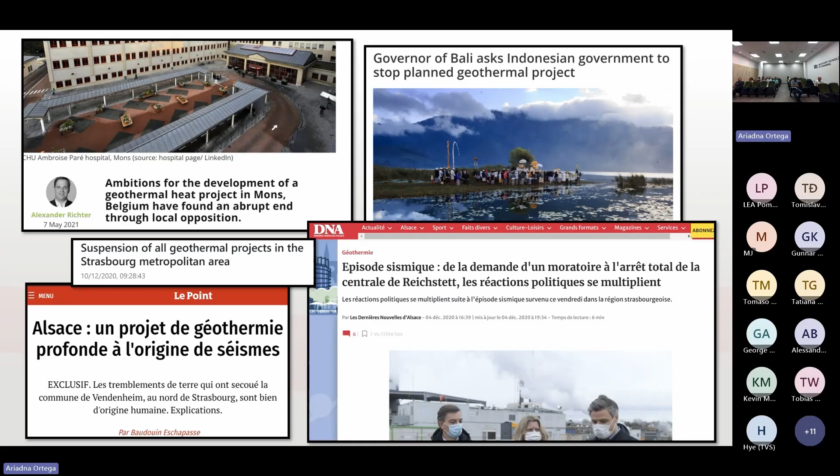Thank you, Dario. We've seen examples of projects that failed because of social challenges and resistance from communities. They had everything ready, the legal license, the financial license, and they proceeded. But because there was a gap between the community and the development, there were issues, and several projects were halted. This is why there is a need for a social license to operate.

So for geothermal, a social license to operate would look like reducing risk of public criticism and conflicts, providing a framework of operation in terms of connection and dialogue between the developer and the communities. This is also an ethical tool to ensure transparency, to reduce investment risk, and also to have a more versatile and easier engagement for financial license.

This is work we developed years back within another project called Crowdthermal. There we designed a conceptual model for the social license to operate. This model is based on the pyramid model, to be able to measure where we stand in terms of social acceptance. To dissect it a little, these are four blocks that you see.

On the left side are the different levels of the social license, from withdrawn to acceptance, approval, and co-ownership, which is the highest. Then you have the different barriers, indicators, and solutions related to each level, related to the values level as well, and the stakeholders.

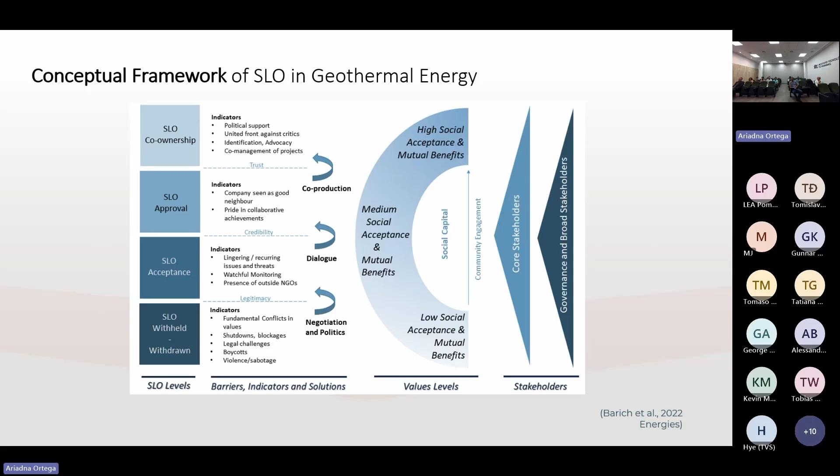So this is the model that helps navigate the social aspects around geothermal development. And here I'm going to give an example of Iceland again. So through voting, Iceland has managed to integrate geothermal energy, and initially it was for district heating.

And we're seeing that as well now in the Canary Islands with the developments that are coming up. Having that support from the authorities is extremely important, but also having people saying yes to that. And this is the story here. Iceland is now a pioneer in the use of geothermal energy, and the Reykjavik district heating is now considered

Among the largest in the world, with 75 million cubic meters a year of hot water, and it actually serves two-thirds of the population of the island, which is amazing.

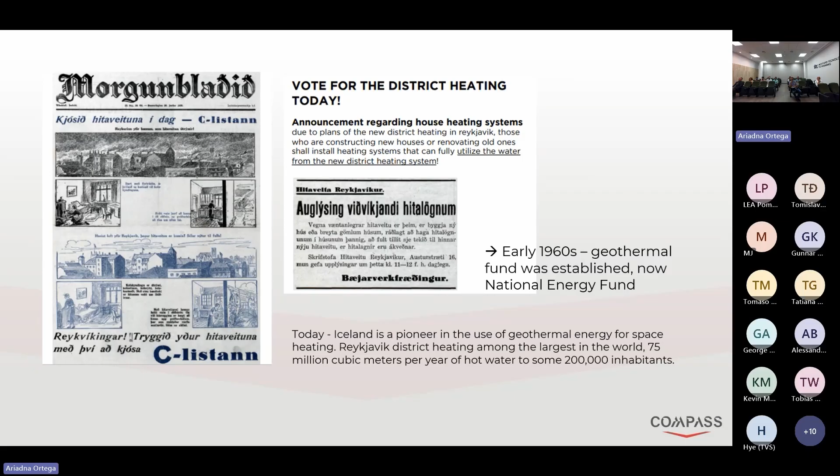So the factors that need to be considered are mutual benefits. We need to benefit from that resource too, and the social license is intrinsically linked to the legal license and to the financial license. It can affect them directly if it's not there. It's an ethical tool, so everything that has to do with CSR and the core values of the developer are important.

I'm going to give another example, this time from Spain. This is a case study we've had within the Crowdthermal project of housing cooperatives at the heart of Madrid.

So people wanted to shift to geothermal. The heating in Spain is supported by gas, which is extremely expensive. So these communities wanted to change that, and they opted for geothermal, and they actually co-funded that project themselves. They got involved themselves in switching to

green energy, so geothermal. We've had two housing cooperatives that use heat and cooling from geothermal, and there were no geothermal social acceptance issues because the people or the end users were themselves the developers. They also involved people they could trust, experts that they trusted to do that. And there was a full community alignment.

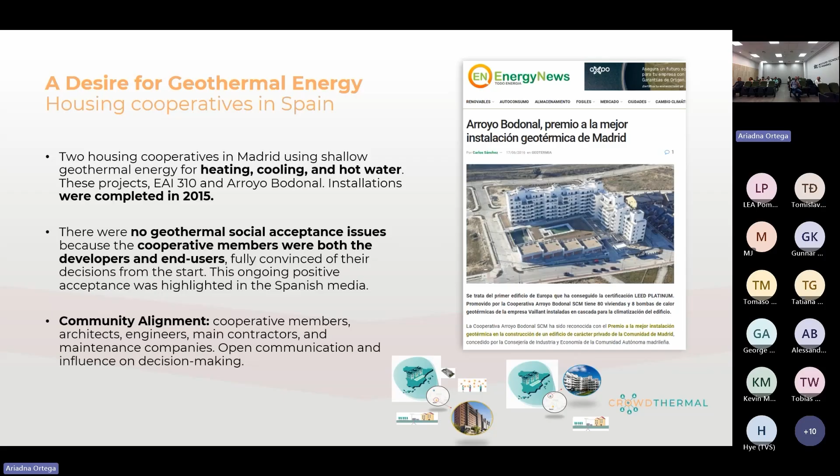So there were cooperative members, architects, engineers, main contractors, and maintenance companies. There was open communication between them, and there was influence in the decision making. This led to a very successful end result, because they even got the prize for the best geothermal installation within Madrid. It inspired other people to do the same, showing that it's doable. So pilot projects are extremely important.

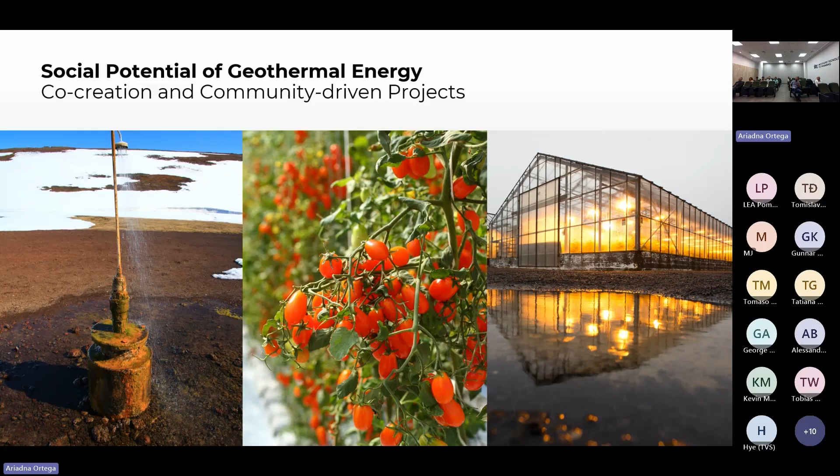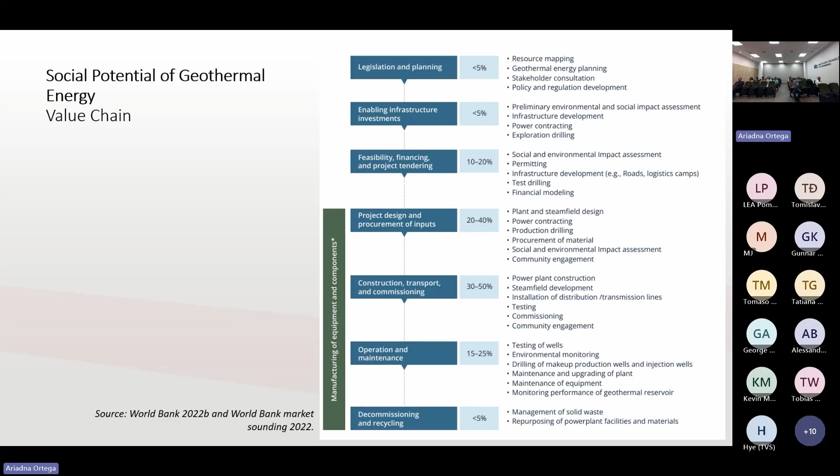Here, showing a bit about the value chain - creating jobs, all sorts of jobs are needed in this value chain within geothermal development, at different levels and different types of expertise. We have legislation and planning, infrastructure, investment and feasibility, financing, etc., until decommissioning. It is possible to create a whole ecosystem around this, and it can change curricula as well, like having professionals directly trained to integrate that workforce, or transitioning from other workforces like oil and gas, or other types of renewables, integrating communities from those other renewable energy communities. So it is quite considerable when we see the full picture.

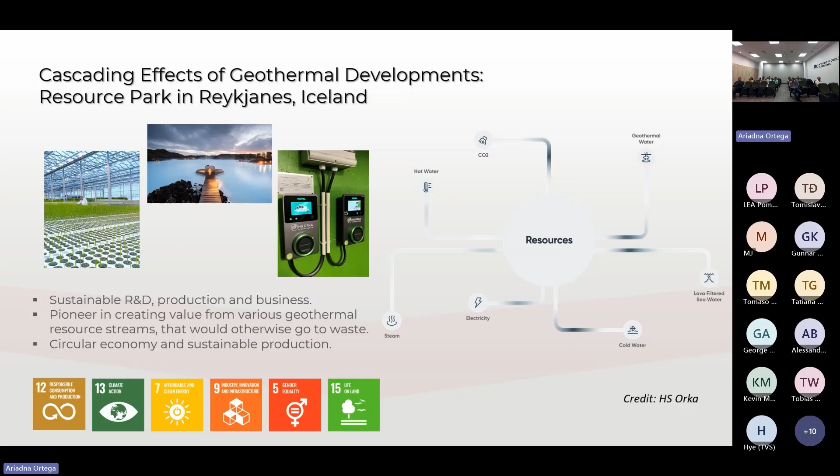The social license to operate model has been relayed as well within the latest report of the World Bank on the socioeconomic benefits of geothermal energy. You can check it there, and I'll give some highlights and conclusions. Building trust and credibility is important with stakeholders, and the SLO is not a means to an end. It is an ethical tool, so it has to create a relationship between the developer, the community, and the stakeholders. Generally, it's important to sustain that relationship, to nurture it, to create transparency around the activities, and by participation...

...to the decision-making process. Efforts to gain the SLO start prior to the implementation of the project. This is often a mistake that a lot of developers make - they're busy getting the permits and funding to move forward with the project, which is also a great effort because geothermal developments are difficult to finance. Investments are not easy to gain, but this does not mean the social aspects need to wait, or only come up when something happens, which is often the case. So the efforts start prior, they're continuous in time and proactive. A lack or withdrawal of the SLO can put a project in jeopardy, despite the presence of legal requirements and financial licenses, and a strong SLO can actually help obtain financial license. This is the case of the cooperative in Madrid - they could unlock that financial license for themselves through wanting and desiring the industry to be there.

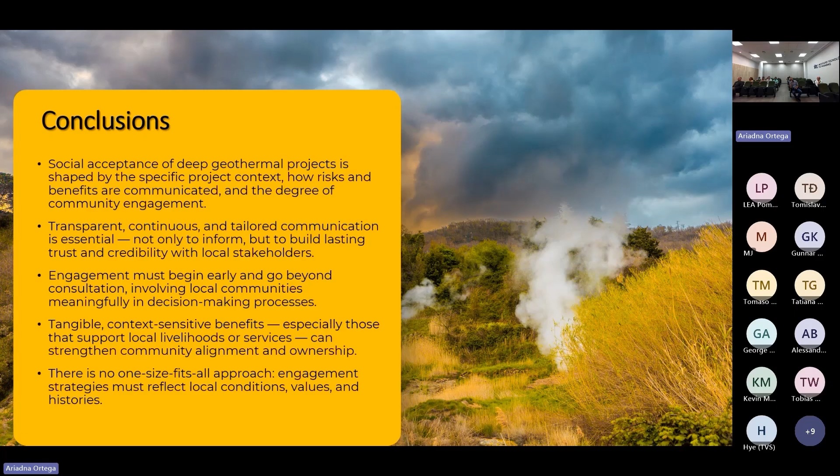Fourth, tangible, context-sensitive benefits, especially those that support local livelihoods or services, and strengthen community alignment and ownership. There's no one-size-fits-all approach.

Engagement strategies must reflect local conditions, values, and history. And last but not least, the social license to operate. It is a dynamic, non-formal agreement that complements legal and financial licenses. It helps reduce risk, improve project viability, and ensure geothermal development is more inclusive and more resilient.